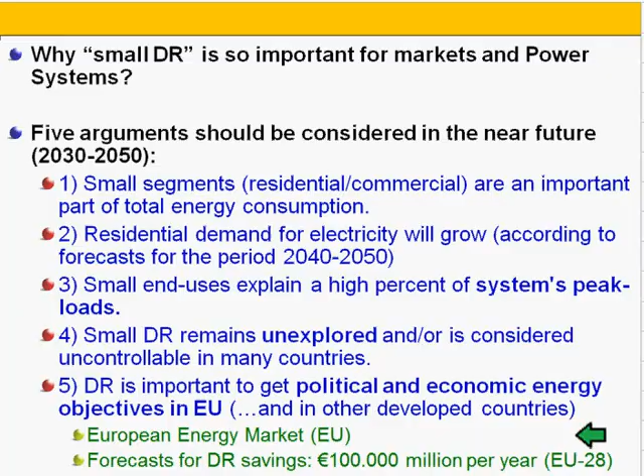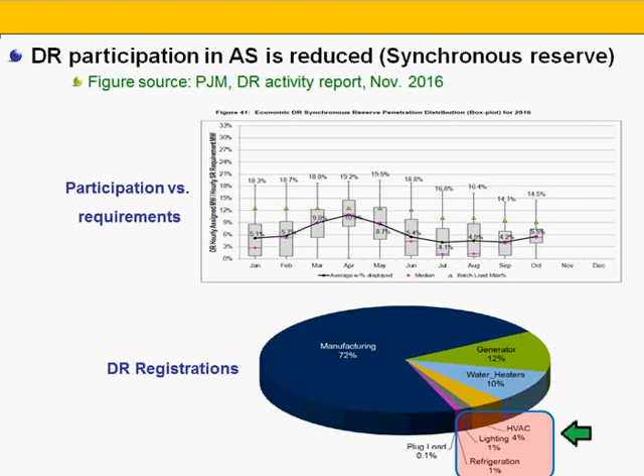Demand response participation in markets has to face up to important barriers: market regulation, a minimum level of flexible demand, ICT requirements, and cost. These barriers justify the lack of participation of demand in a representative and open market. This slide shows the state of demand response affairs in markets. The participation of demand response does not match its potential. So, the development of specific methods to evaluate and demonstrate seems necessary.

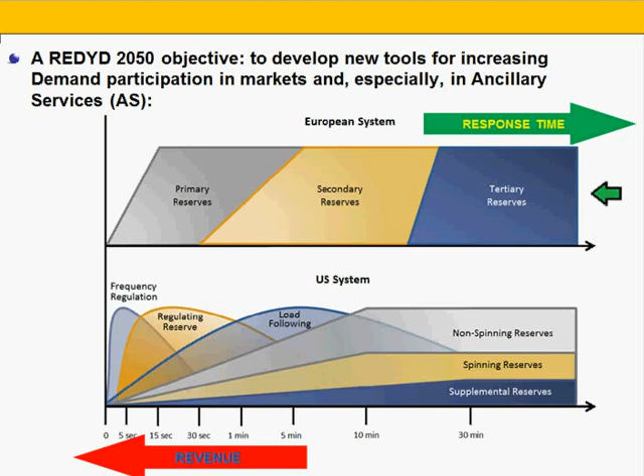Moreover, some barriers appear for the customer. For instance, the difficulty to understand the different names of services in each country. This figure shows the differences between the United States and European Union nomenclature.

The second act of this video is the description of the methodologies we are going to use for evaluation purposes. The methodology for carrying out the work must exhibit some properties. First, the model should be universal. That is to say, it is important to avoid any unnecessary complexity for aggregators and customers. That's to say, the same database of parameters, and to develop similar steps to build the whole model irrespective of the market or service.

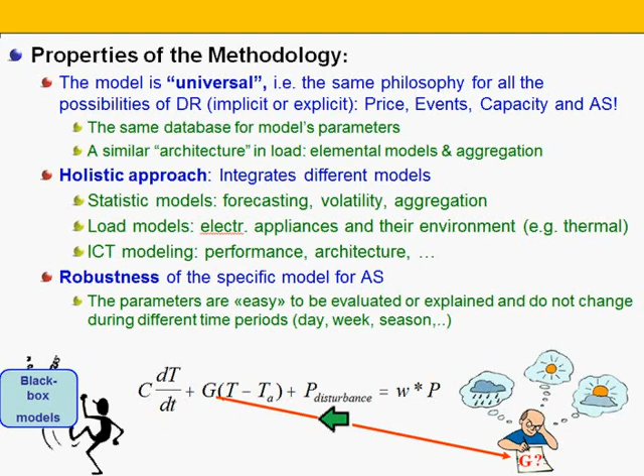Demand response methods. The use of the same modeling basis for different demand response policies seems affordable with the use of physically based load modeling. This model represents the processes occurring between load and its service, involving physical information. This model usually has several components which use thermal electrical analogies.

For example, the dwelling environment submodel: resistors that represent heat losses, in this case conduction or convection losses through walls or windows, as well as heat gains, solar radiation, or internal gains due to inhabitants or appliances, as current sources.

Also, the model takes into account heat storage from the specific heat of walls, indoor masses, or roof and ground through capacitors. The appliance and its energy conversion into heat: space heating, cold, air conditioning, or hot water. This is represented by a current source that switches on and off, or it is modulated by the internal control mechanism.

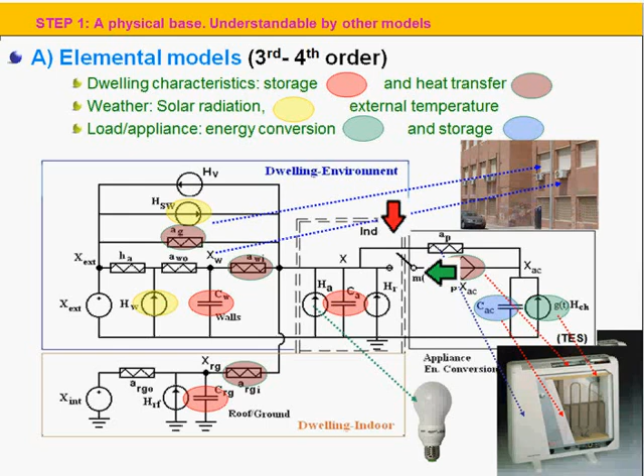The internal control mechanism, for instance a thermostat, which draws the demand from the electrical grid. Models such as the one shown in the previous figure are third or higher order models. For example, EnergyPlus software models.

If the user considers in detail the heat losses, gains, or storage in each element, wall, roof, ground of the dwelling, or in the case the appliance has some kind of energy storage, a new capacitor.

The higher the order of the system, the more complicated is its resolution and the aggregation of these models, and consequently the response is lagging with respect to ancillary services requirements. The boundary condition for model order reduction is to consider the effect of some thermal masses as a constant. This is due to the high inertia of these elements.

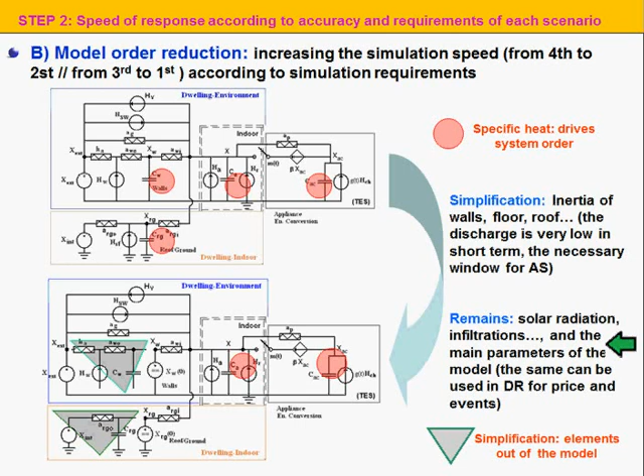This fact reduces the accuracy of the model, but allows a faster response. In each case, the user should balance the precision of the models against its response, selecting the best option according to the problem requirements. The participation in ancillary services requires a minimum level of load response, from 100 kW to

several megawatts. To overcome this barrier while meeting the needs of system operators, efficient and easy aggregation methods have to be developed. In our case, the aggregation process joins loads with the same end use: air conditioning, water heater, thermal energy storage, in dwellings with similar characteristics, service, and location.

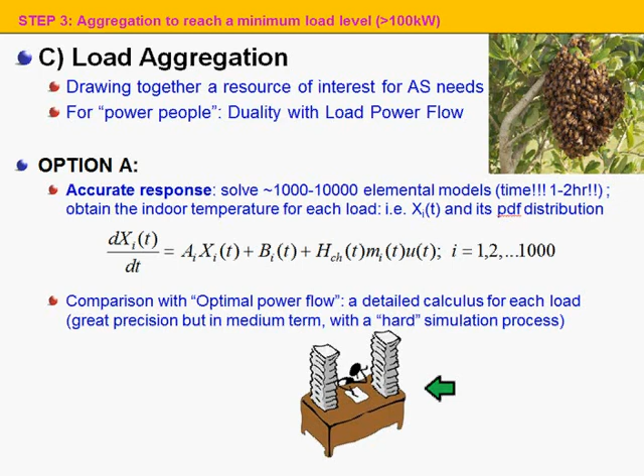The first alternative for the aggregation problem is to solve the state-space system for each load in a control group, and then obtain the power of the aggregated load through Monte Carlo simulation, and then the statistical distribution of a state variable. This procedure needs the simulation of a large amount of loads, 1,000 perhaps or 10,000, and this takes some time.

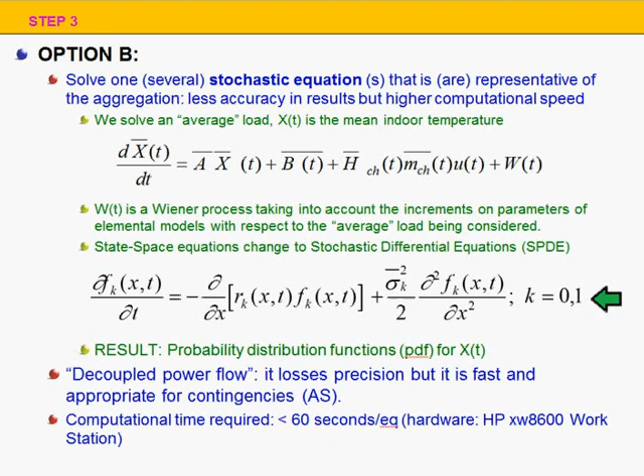Of course, this is a simplification of the problem, and obviously the question is: is the average load representative enough for the overall control group? There are many different ICT alternatives available in the market that present different features. The most appropriate communication technology is influenced by the traffic characteristics and communication constraints of demand response.

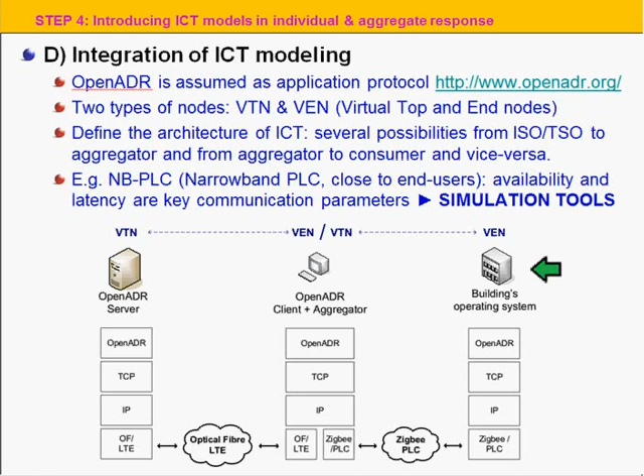On the other side, the aggregators are typically close to their clients. In these cases, low-range technologies with lower data rates can be used, such as Zigbee or power line communication. In particular, narrowband PLC is being deployed in the last mile of AMI, mostly in the European Union and China, but also in the United States or Australia.

Other models and tools previously developed by REDYD2050 are under study to be integrated in the medium term. For example, some of these concepts are price volatility and price forecasting. The possibility to develop algorithms for market prices is a topic of interest. Literature classifies prices and market risk according to its variance or standard deviation.

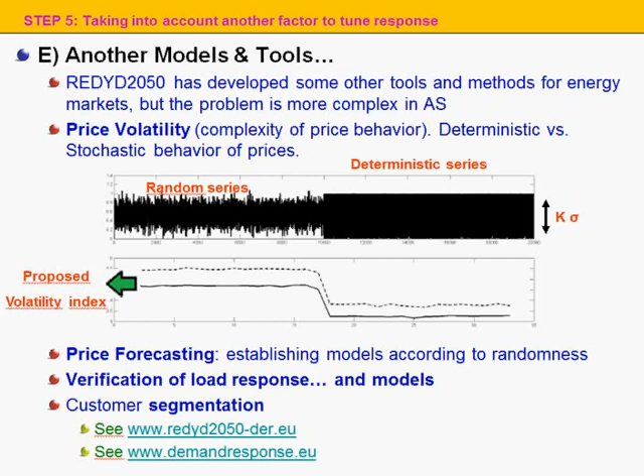But this usually is not true. The problem with price is to determine the randomness or deterministic behavior of a time series. And that is a very different question. More information about these tools and topics can be found in REDYD2050 web pages.

We mean to assess the dynamic response of the models according to ISO requirements. They range from seconds to some minutes after ISO requests the activation of specific resources, and also the time period during which the model should provide feedback and data to the aggregator.

PJM market rules and events have been analyzed since 2008. For instance, 98% of events in synchronized reserve last less than 40 minutes, and the average time is 11 minutes. But ISO qualification of demand response might require longer periods, from 60 minutes to 2 hours.

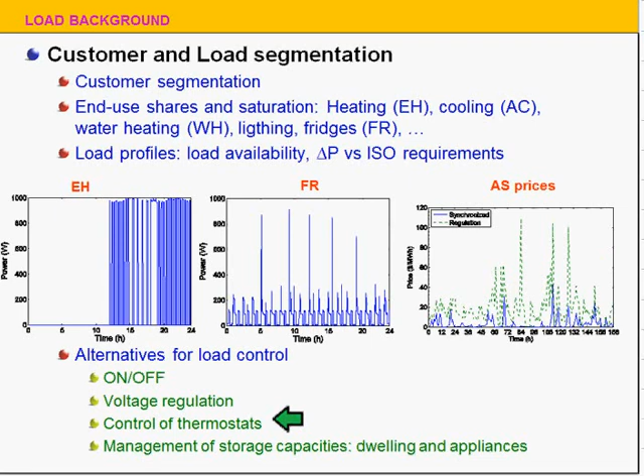With respect to elemental models, different simulations have been performed with fourth, third, second, and first order models, with a time horizon around 60 minutes. The first order model suits the dynamics of internal temperature with bounded errors which range 10–15%. Time response of models requires the use of a stochastic partial differential equation to provide the aggregator with the necessary time to manage control policies while responding to ISO requirements.

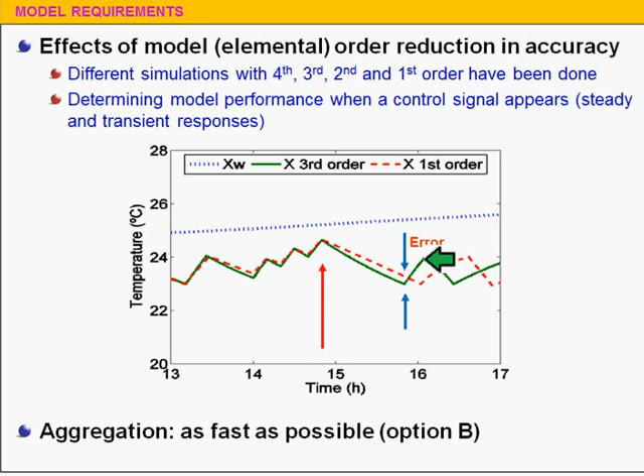The performance of OpenADR over narrowband PLC infrastructure is evaluated through simulation tools using as metric the latency under three different types of noise. Results show latency times which range from 6 to 12 seconds. The simulation work allowed modeling the round-trip latency based on statistical parameters such as the mean and standard deviation.

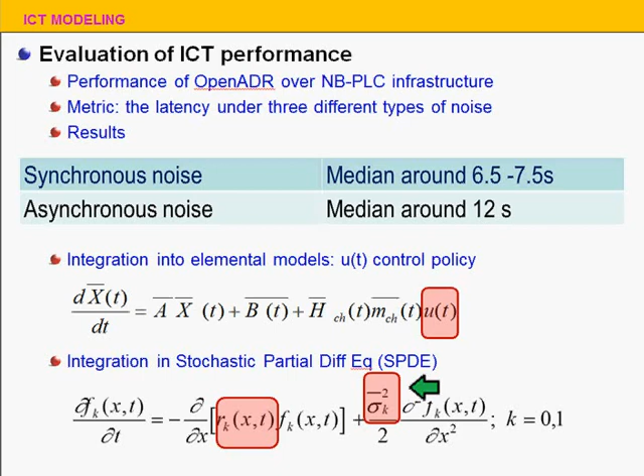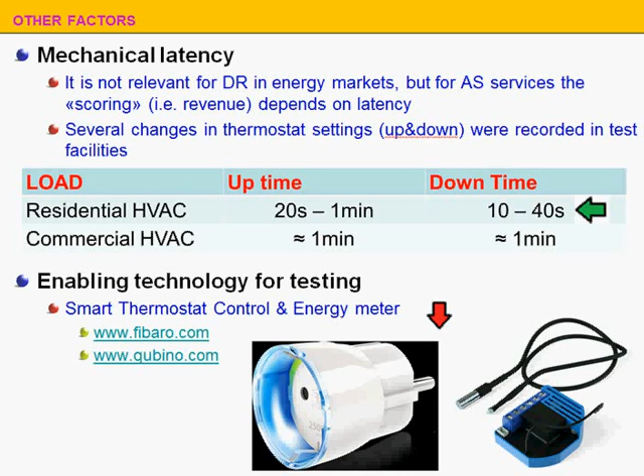Both are used to define the input vector u in the state space equations and the noise in a stochastic partial differential equation that we are going to solve in load models later. Mechanical latency, or the delay of the appliance's compressor, is also considered through on-site testing. The reason is that this class of latency is of the same order of magnitude as ISO's delay requirements, that's to say, between minutes or a few seconds.

The integrated model provides the aggregator two outputs: demand in kilowatts or in per unit, and the statistical distribution of state variables, in our case, the internal temperature. The probability distribution function of internal temperature, X, also brings up the necessary information to feed the thermostat setpoint.

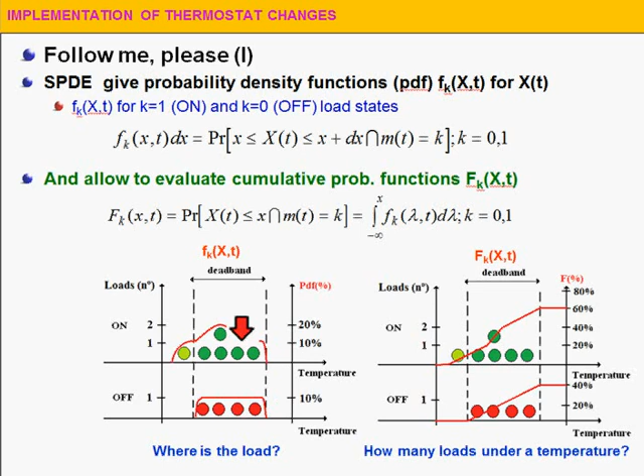In the figure, each ball represents 10% of loads. Their location in F1 or F0 shows us if appliances are switched on or off. Their location on the horizontal axis shows us the temperature of the dwelling. Let us explain the use of the probability density function for demand response.

If the power system test signal being received from ISO requests a 25% reduction in load demand, the aggregator should determine the work of the thermostat that puts outside the deadband 25% of on load. That's to say, the area of function F1 should lose 25%.

Afterwards, the test signal rises. The scenario changes to function F0. Again, the aggregator should determine the work of the thermostat that puts outside the deadband 25% of load. That's to say, the area of function F0 should decrease. This area in gray color moves from the off function to the on function.

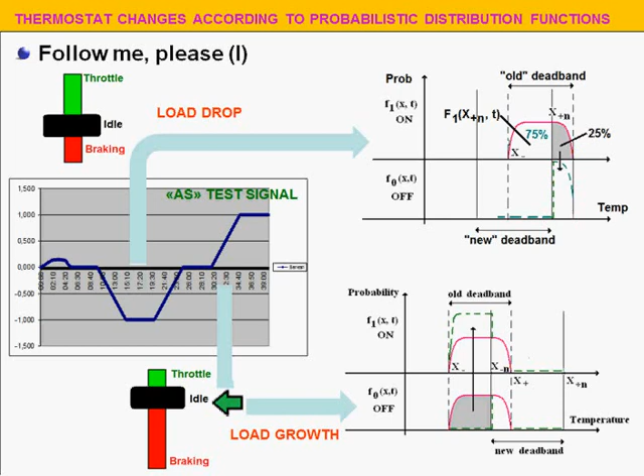Of course, some artificial neural network tool should help the aggregator to make this task possible and easier, to calibrate the so-called load regulator and the throttle and braking behavior of load. This slide shows an example of the response of the aggregated group.

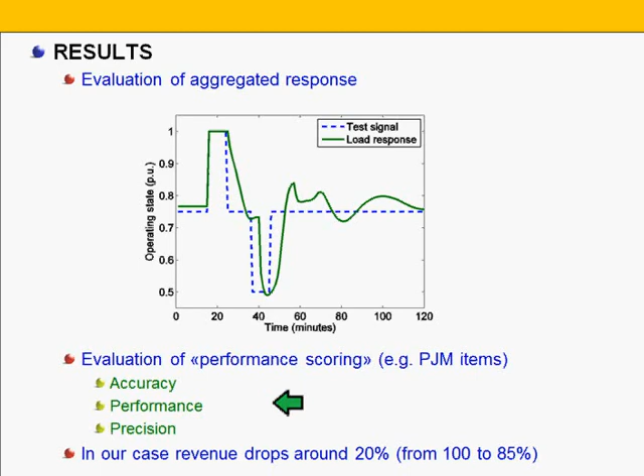For the same market, for a test signal, ISO evaluates the performance score, taking into account the accuracy, the performance, and precision of load response. With this feedback and with artificial neural networks, the objective of Reddit 2050 in the medium term is to refine and tune the integrated tool while improving the performance scoring of demand response in regulation and synchronous reserve markets.

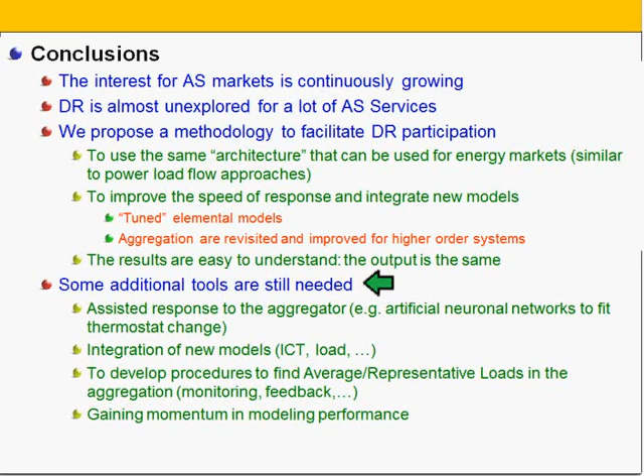In conclusion, the integration of renewables raises interest in new flexible resources such as demand response. Reddit 2050 proposes insight, that's to say, integrated tools and methods to facilitate demand response participation, in this case in ancillary services. But new and specific tools are still needed. Their development is the Reddit objective for the next years.